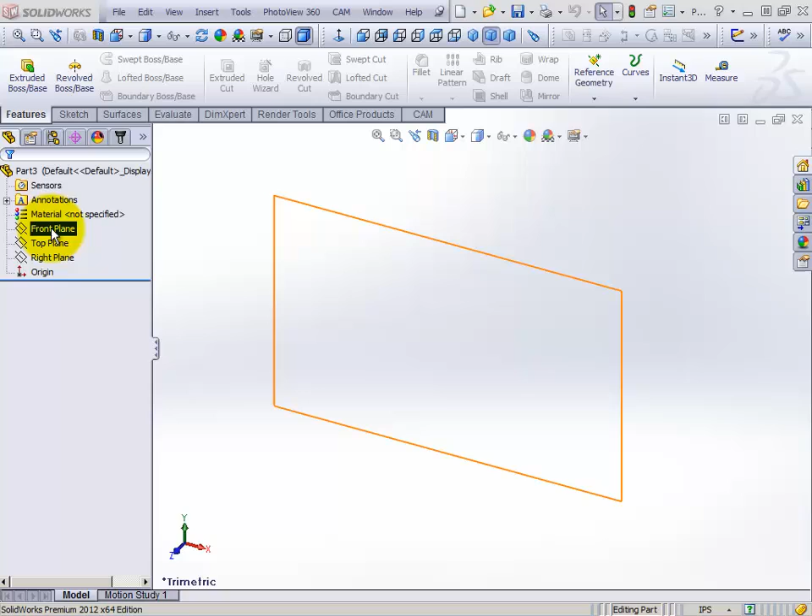So I'm going to do a File, New. I'm going to pick a part, and I'm going to go straight to the front plane here. Left click, sketch, and I'm going to pick the rectangle, center rectangle, and I'm going to pull that out to 1 and 1, and we're going to do check mark, and I'm going to pick offset entities here. If you get something weird like this, just do X and try it again, and a lot of times it'll just come back to what it's supposed to be.

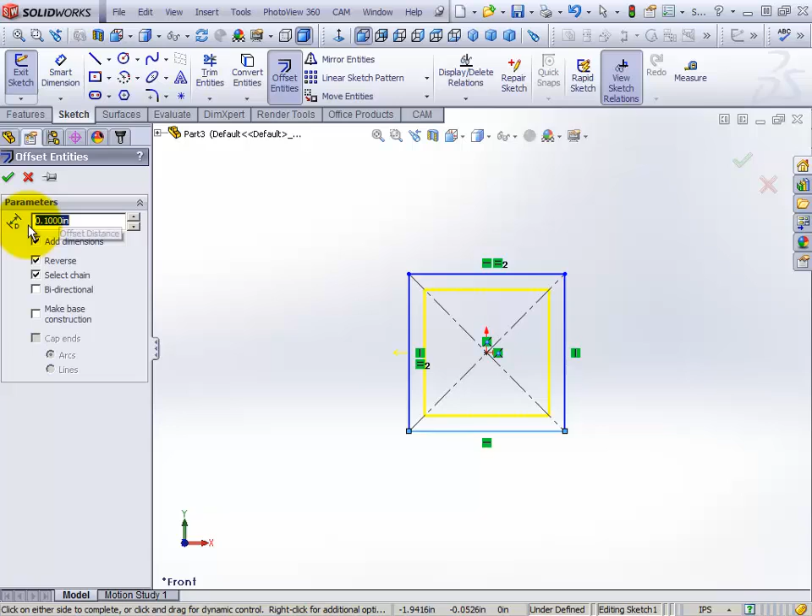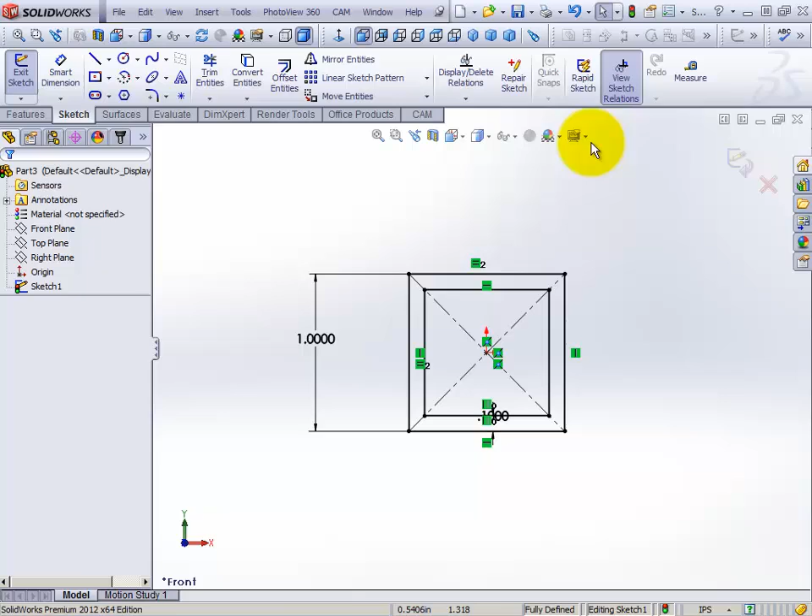Set this to 0.1, and you'll notice I made it a line on the inside. Okay, and we're going to go ahead and smart dimension this thing right away. And you see it's fully defined because all of the relations we've talked about before are all there. And we're going to exit the sketch. We can do that here, or we can do it here. So if you like doing it here, you can.

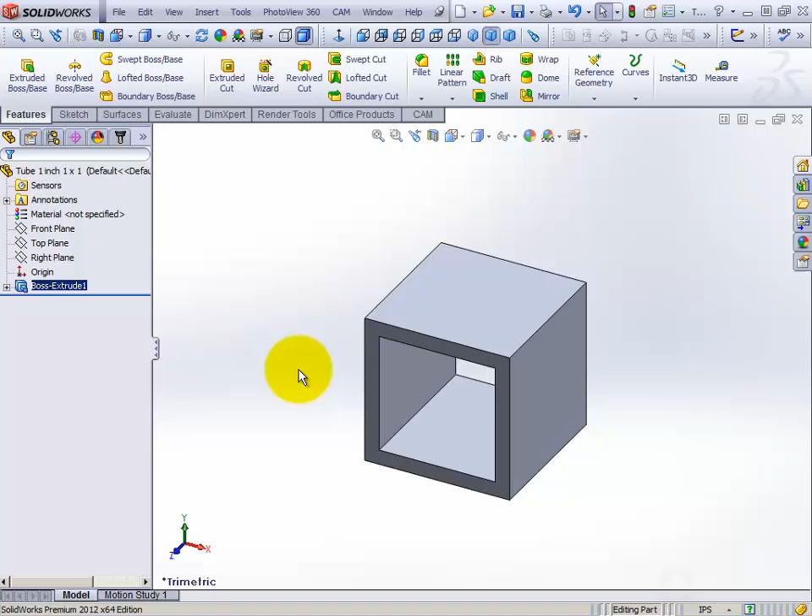And we're going to go up to extruded boss base right here. I'm going to pull this part out to 1 inch and hit check mark. And I now have a 1 inch piece of tubing. Now we're going to make up a family here, so I'm going to do File, Save As, and I've already got some of these here, so I'm just going to go ahead and save this as tube 1 inch by 1. I'm going to go ahead and capitalize that so it looks nice, and I'll say save.

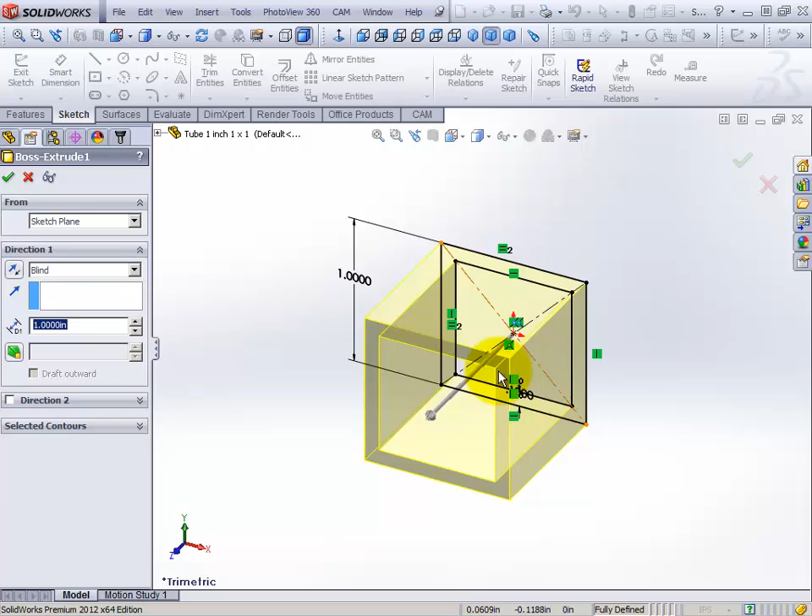I'm going to show you how to make another version of this. This is something you haven't done yet. You're going to go to Boss Extrude, click right, and you're going to see this one called Edit Feature. Edit Feature allows us to change things that we've already had on features. Now you notice this is showing our part with a 1 inch pull. Now I'm going to kick this up to 12 inches. I could just type the number in, but I always have fun watching it grow like that.

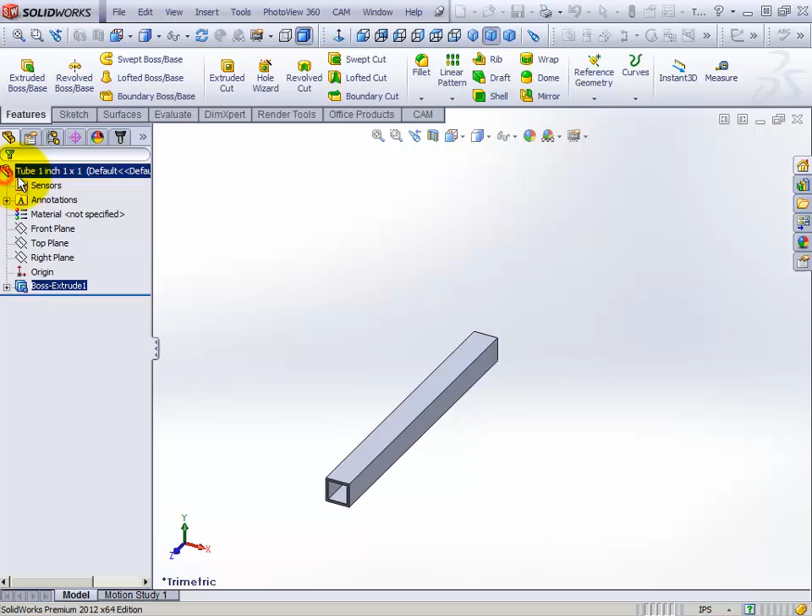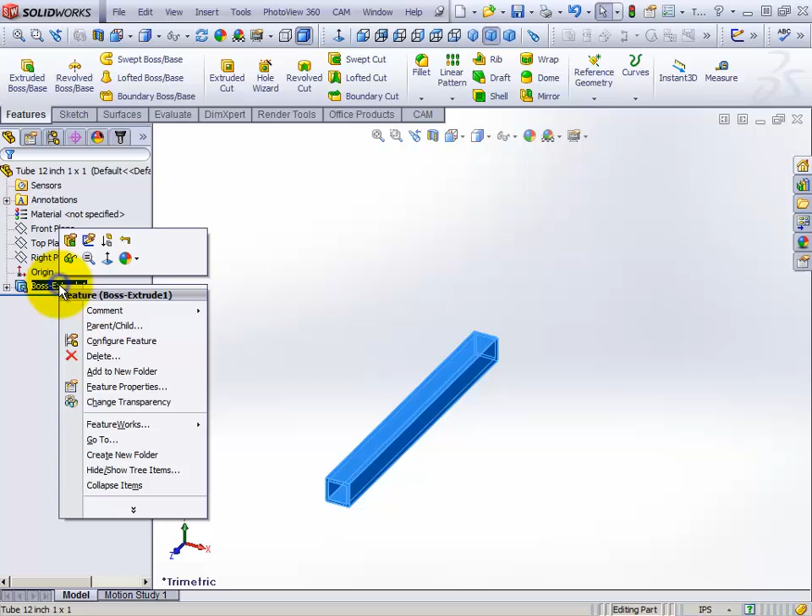Okay, now I have a 12-inch long tube. Hit OK, File, Save As, and I'm now going to just put a 12 here. So now I have a 12-inch tube. And you can see I already saved a 2, a 4, a 6. I'll save that. And then I want one more. I'm going to right-click on that, Edit Feature, and I'm just going to type in 24. And you'll see my tube got really long there. And I'm going to hit OK.

And I'm going to do File, Save As. And you can guess, I'm going to type in 24 inch here. That's right, type in 24. 24 inch. And hit save. Okay, so now I have a whole bunch of lengths of pipe or tubing that I can use for assemblies. So we're going to go on to assemblies here in a second.

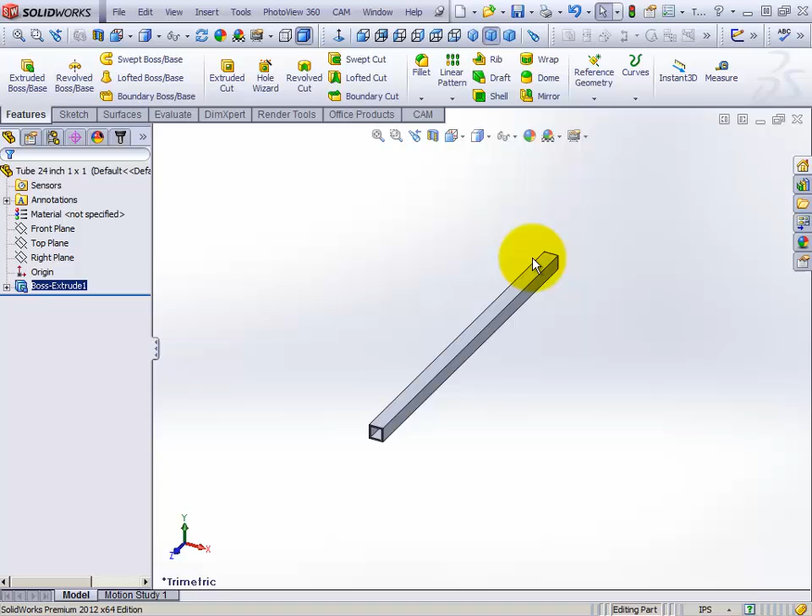Okay, we're going to go ahead and close this. So I'm going to do File, Close, and now I'm back to the base. And this time I'm going to do File, New, and this time I'm going to punch the Assembly button. This is the new one for you. You haven't used this yet. Hit OK, and it looks like this when we bring up the screen. Okay, we're going to want to put some parts in our assembly here, so I'm going to hit Insert right up here, Insert, Component, Existing Part.

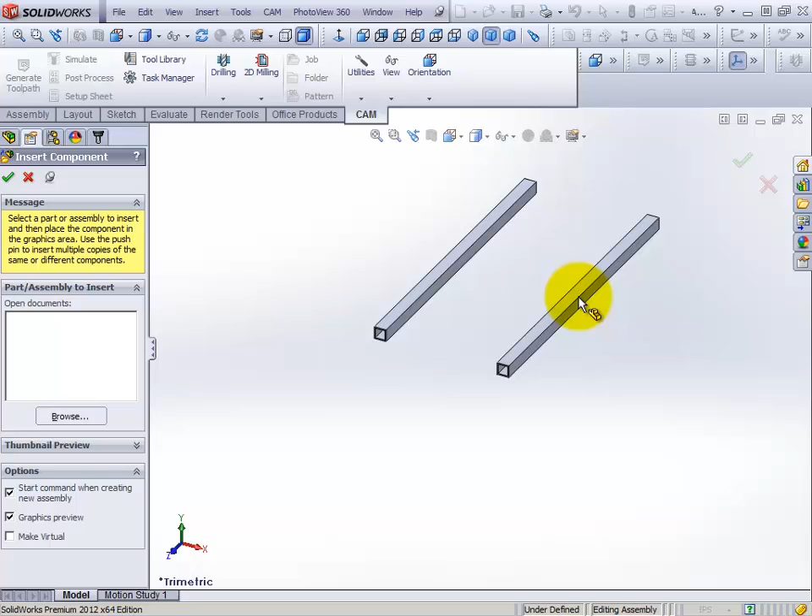Okay, and then I'm going to punch the push pin here, that'll hold that on, and I'm going to hit Browse. And I'm going to build a frame here, so I'm going to pick 24 inches and open that part up, and you'll see it gets attached to my mouse. I'm going to want a few of these because I want to build up a frame. So I'll put one there, one kind of there, one there, and one there. And when I'm done, just hit the escape key, that's the easiest thing. So hit the escape key and that'll stop putting that part in.

Now I also want to put some cross members to this, so let's use just 12 inchers for right now. So I'll go back and I'll do an insert, component, existing. I'll keep the push pin on here for a minute, browse, and I'll say okay, I want to use some 12-inch tube and open that up. And I can use different techniques here, but I'm just going to put these over here for a minute. I'm just going to pile them up, and we're going to just hit X out of the insert component here.

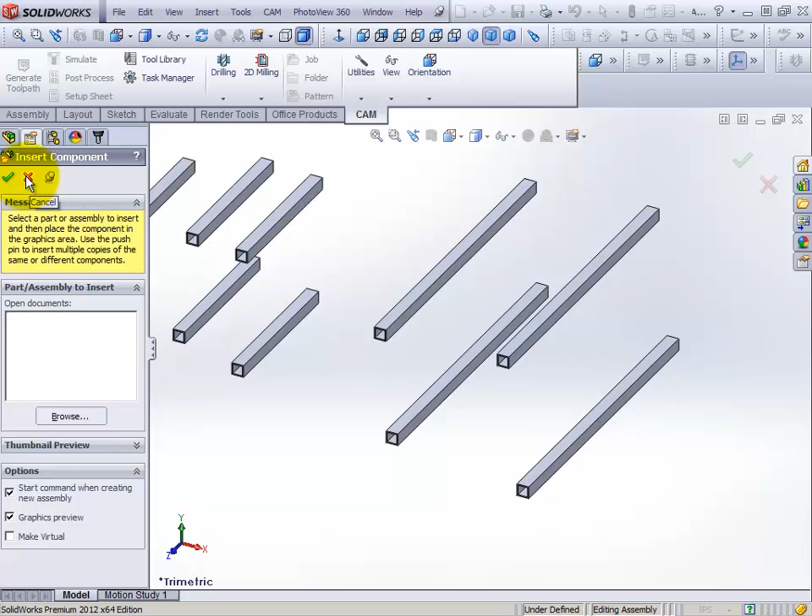Okay, to move one of these parts around, all you have to do is right click on it and you can drag it as far as rotating it around like this. Okay, so I can just kind of move it around until it's kind of right. Then I can left click it and just kind of drag it where I think I want it to be.

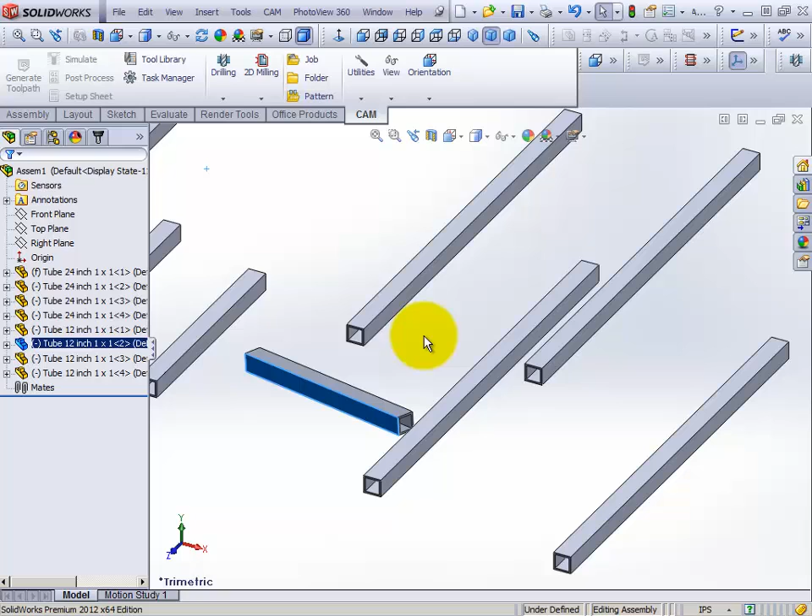But this gets kind of crazy because you're in 3D right now and things can be really different, you know, where they're really located. So you can see I just finally crossed into that part, so I'm finally at the right elevation. But we don't have to worry about all that. What you're going to learn how to do is mating. Okay, so go up here and hit the assembly tab. And I'm going to click the mate button right here.

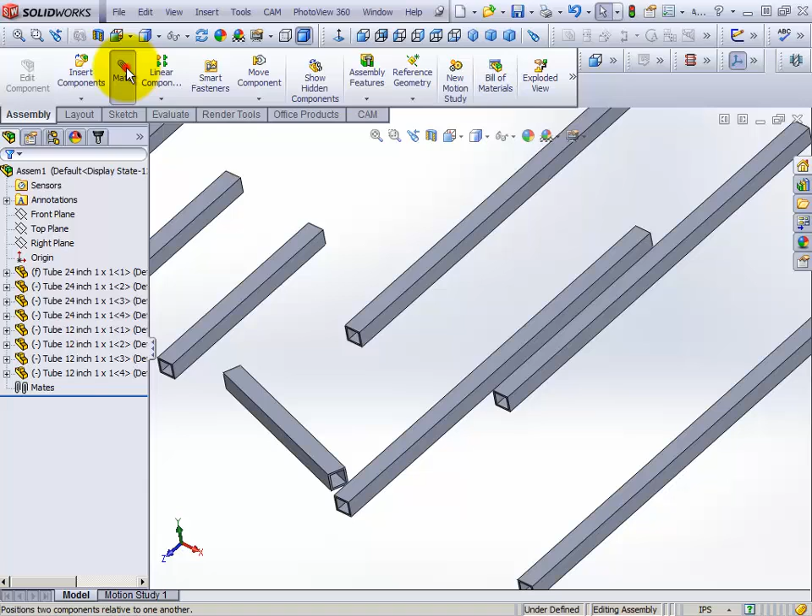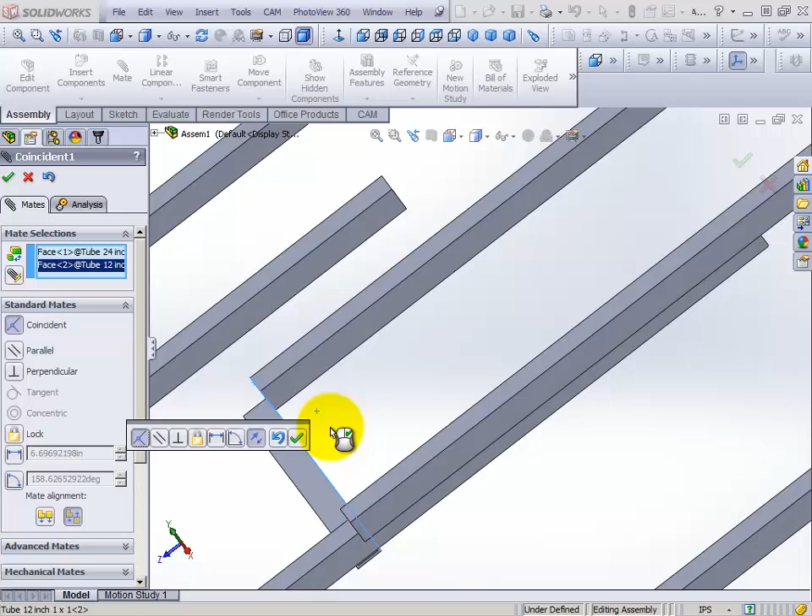And I'm going to zoom in and I'm going to pick the face of this. Now notice I can pick lines, but if I zoom in really close, you see I'll pick up that whole face. I'm going to pick that up. And then I'm going to turn, using my center mouse button, holding it down, and I'm going to pick the face of this one. Notice I'm not picking a line, I'm picking the face. And you see how it kind of aligned up like that? I'll hit the check mark right here, meaning I like what I just did.

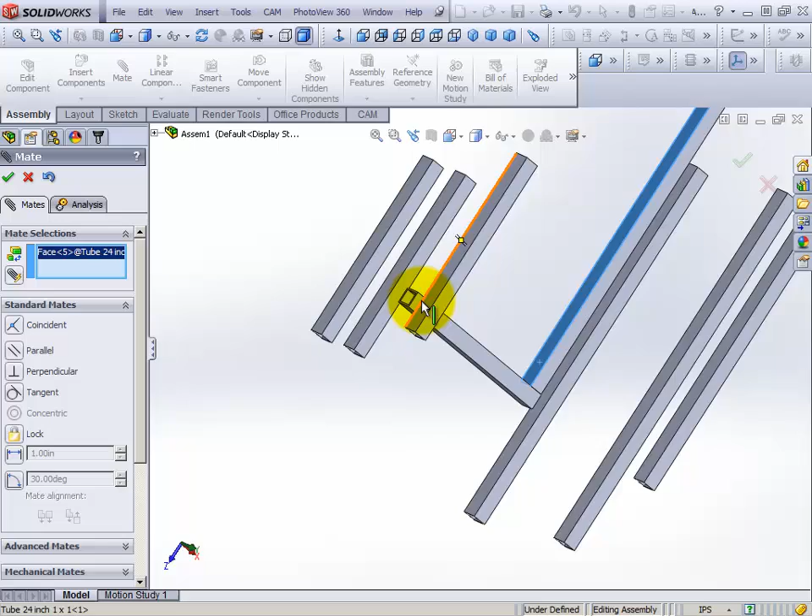Now that's part of it. Now we want to get this and this together. So I'm going to pick this face and this face. Okay. And I'll say, yeah, I like that too, because I'm starting to put these together. But I really wanted to put this end and this end of the tube. Now zoom way in, get the face of that tube. You'll see it suddenly disappear, and oh my, look at that. It's right where we want it. We just put a nice joint together. It took 3 mates to do that.

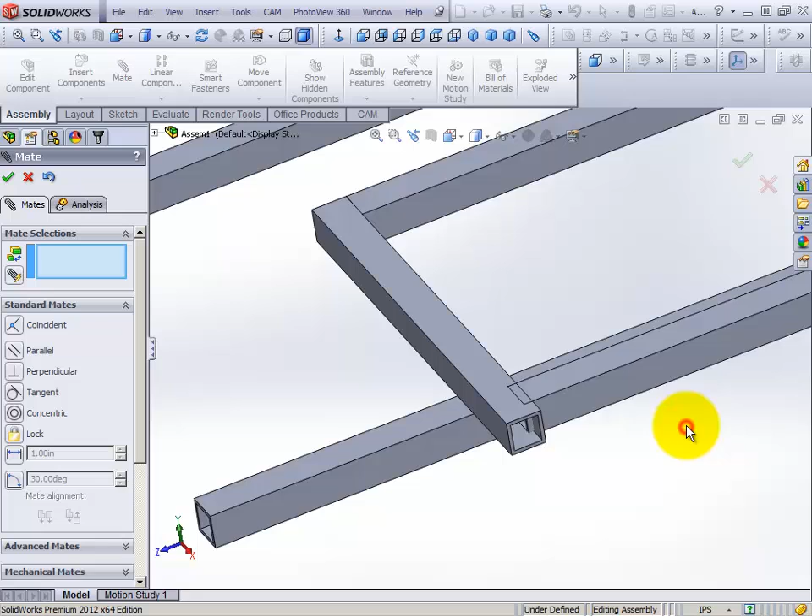Okay. Now I'm going to pick another one here. I'm going to pick this face and this face. And you notice those sort of went together. I'll pick this face, zoom in on this face, and those two went together. But you'll notice that there's one thing with a problem. You know, I can pull this away. Okay. And what I have to do is I have to pick this face. I'm just using left mouse clicks here, and you'll see I put that one together.

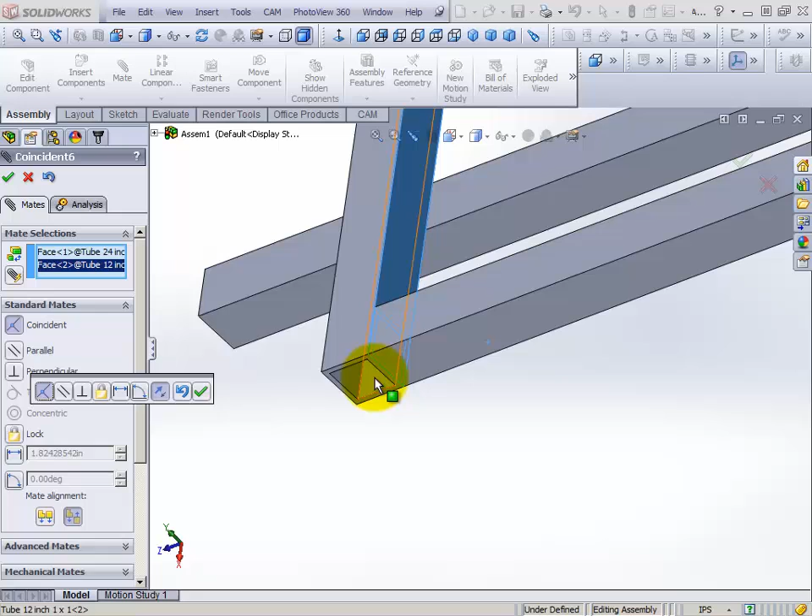Now I can take another tube, like this one, and you just got to kind of get used to looking at this stuff in 3D. I'll move this one out of the way so it's a little easier for me to see. So this time I'm not even going to try to orient them. I'm just going to pick this face and this face. Now they're already wanting to be together here. I'll pick this face and this face, and they want to be together.

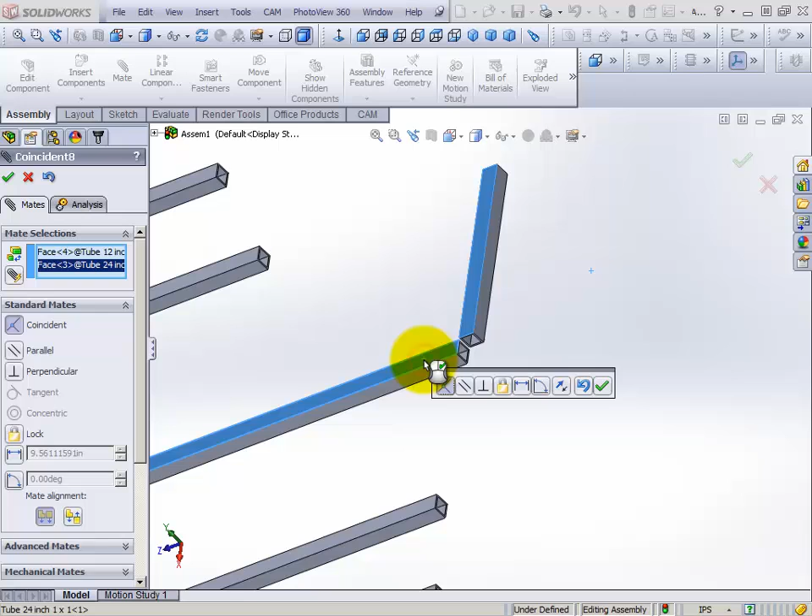And remember, I wanted to actually put this together the other way, so I'm going to pick the end face here and this face, and that lines up those two faces. These are all called coincident mates. Now you notice I didn't actually have to put a mate on this one. It's not important that I do, because it's not like these are mechanically fastened. They're all being constrained in space. So right now I have a complete tube set.

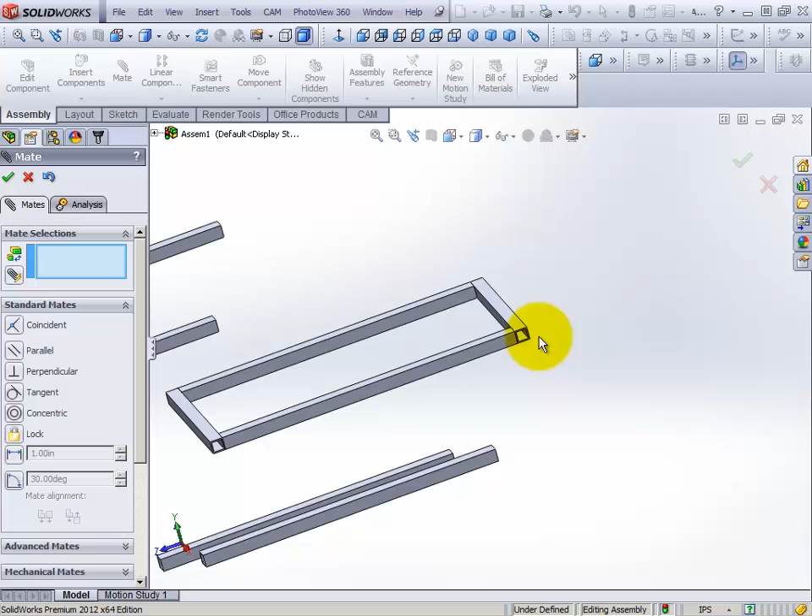Okay. Now I'm going to do it again. So here we go again. I'm going to build the other side of the frame. So I'm going to drag this down so it feels a little bit better to me. And I'll even use the right mouse click to rotate it and hold it and drag it. So I've got the right mouse click held down right now.

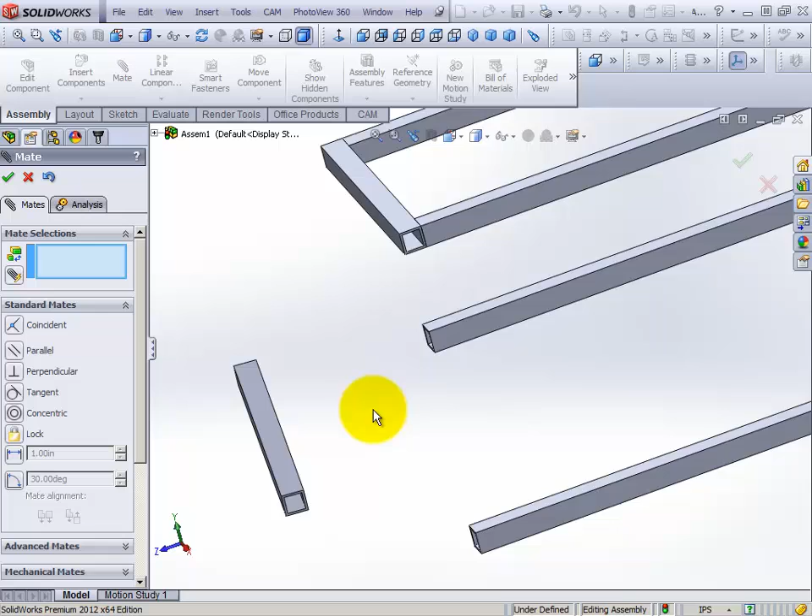And same thing, I'm going to zoom around with my middle mouse button so I can turn it around and see this. Pick that. And I'm going to turn around. I want to pick this face right here. And sometimes it'll look kind of strange, but you just keep doing your faces and it'll all work out for you.

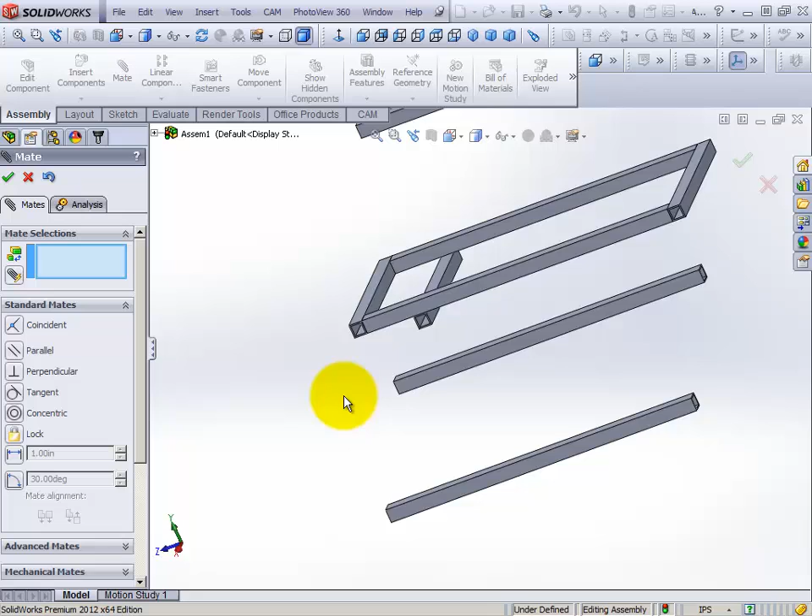Okay, now I want to put this face right here. Zoom in until you can get the face. You don't want any edges, you want faces. And as you can see, it zings it right over into place for you.

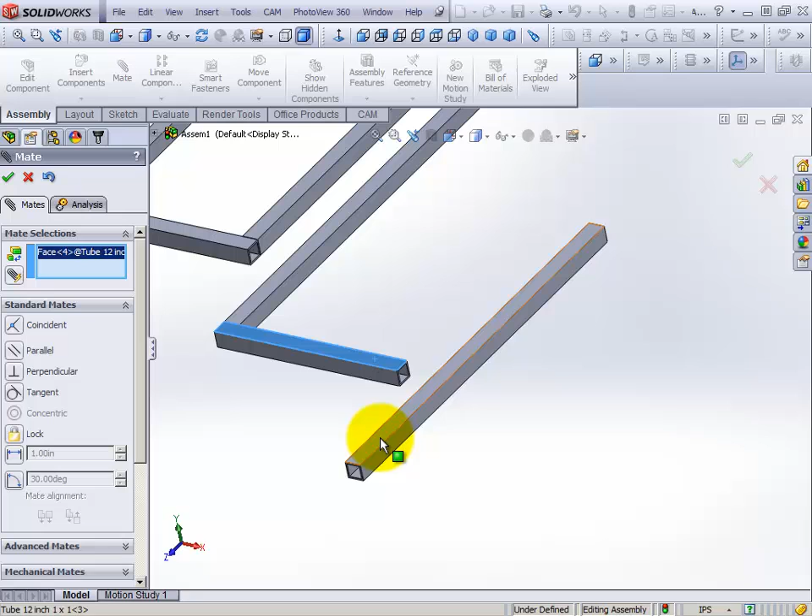We'll pick this face, and puts those together, and you can see I'll slide it over here now. And I want to pick, just keep zooming in until you can get a good grab on it, that face.

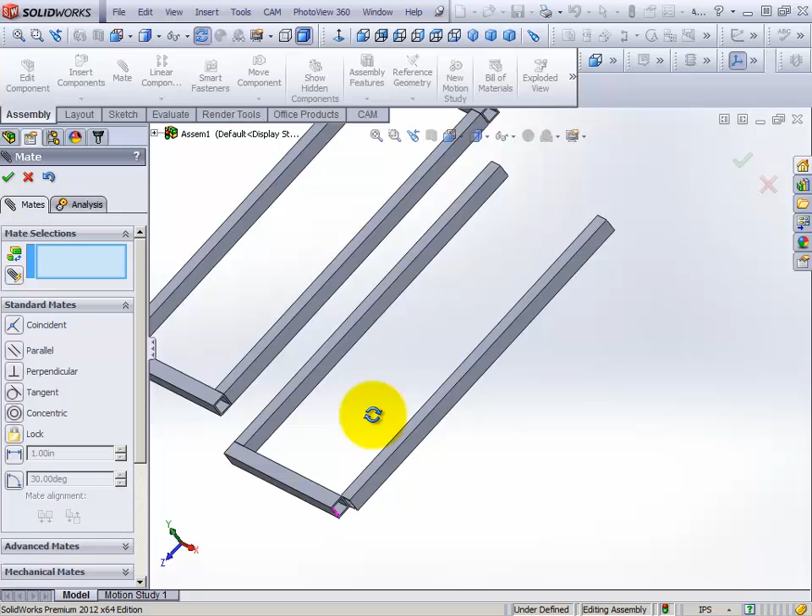After a while you'll get used to working in your 3D world here, okay? It'll feel real comfortable to you. And I want this to line up with this. And once again, if you can't get the face, zoom in, okay? Once you zoom in, it'll become real easy to get it. A lot of people make the mistake of trying to do everything from long distance, and that's not good.

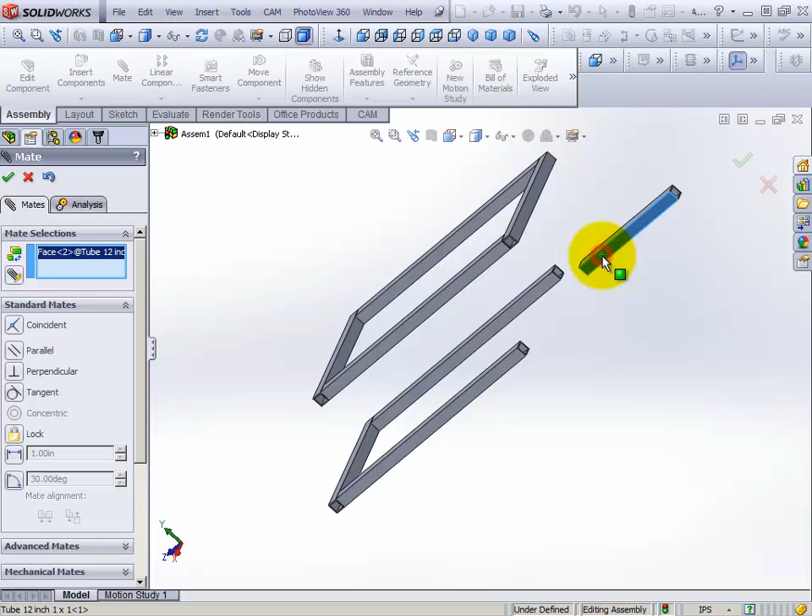So I'm going to pick this face. Okay, I slid on that one, so I'm just going to pick this face. And this face. Oops, see, that's a line, I don't want that. See the undo? I want to do undo. So I have to start again.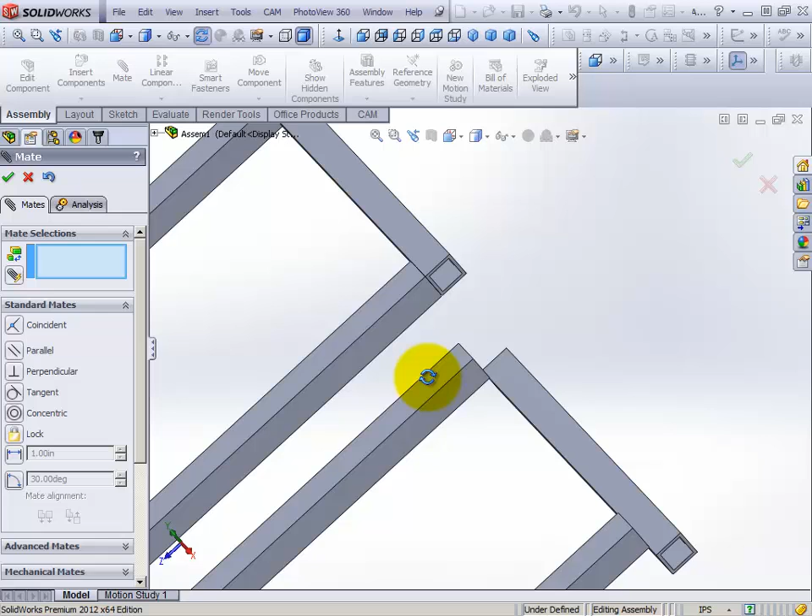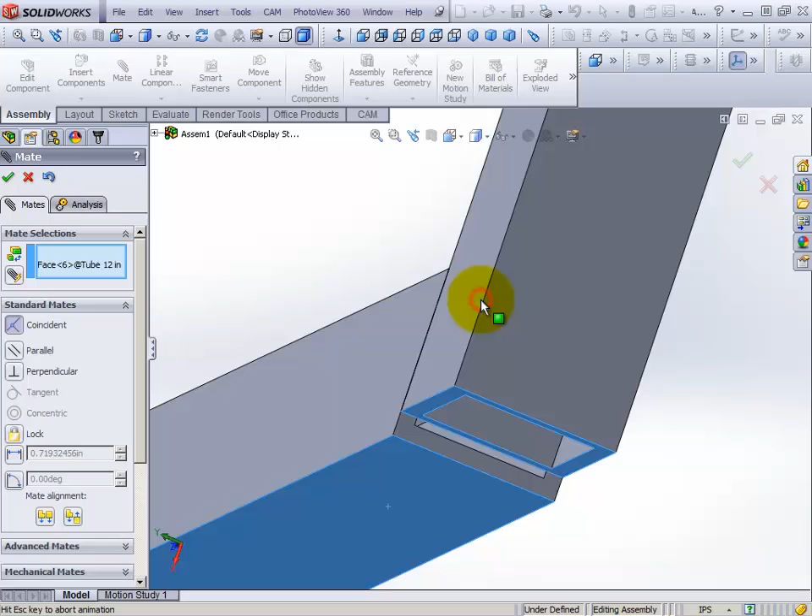So I'm going to pick this face and this face. Okay, and I want to pick this face, that face. And notice we still can slide this way, so we still have to fix that. So I can actually just pick this one over here and pick this face and that face. So as long as I'm all done, they all slide together like that, that's great.

Okay, so we have two frames here. What we want to do is put this together with a couple more parts. So we're going to go back up and do Insert, Component, Existing Part, pin that, Browse, and let's pick the 12-inch tube.

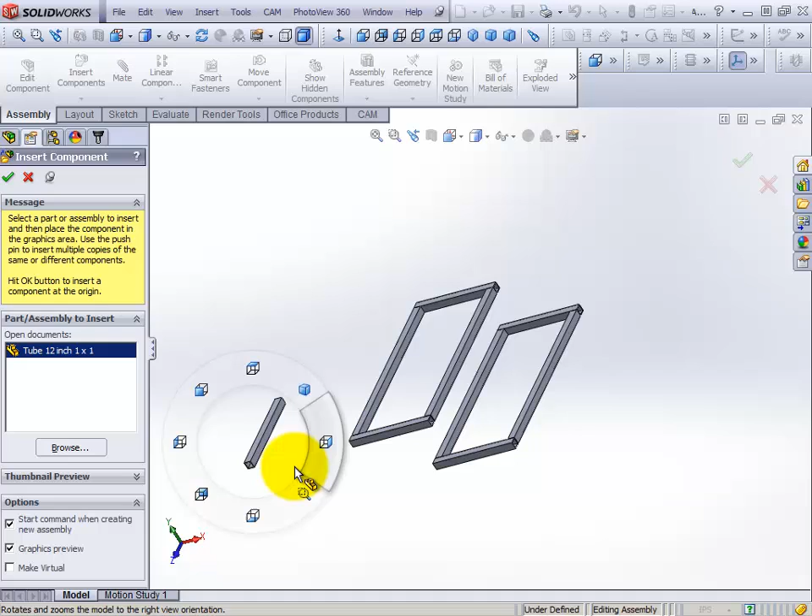Okay, and I'm going to go ahead and place that one. I need 4 of these, so I'll just put these over here. And then when I'm done, I can just hit X here, and I'm done with that.

And now what I want to do is put these as support members. These are going to be called columns now. So I'm going to kind of move this, rotate a little bit so I feel better about how this is going together. I'm sorry, I just hit an extra click there.

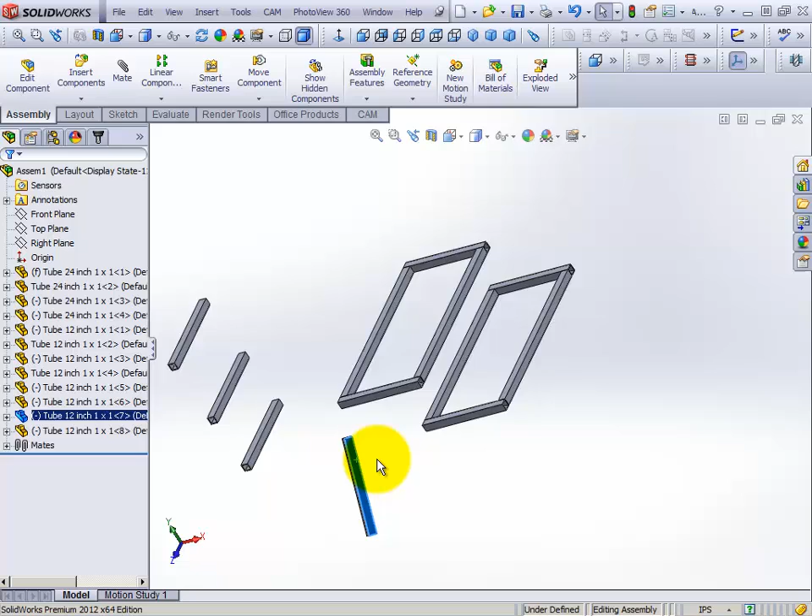And I want to hit Mate again up here, Mate. And I'm going to click this face. And that face was already selected, so it'll line it up. And then I'm going to click this face, and I got to click the underneath side of this one because that's where I want it to go. Okay.

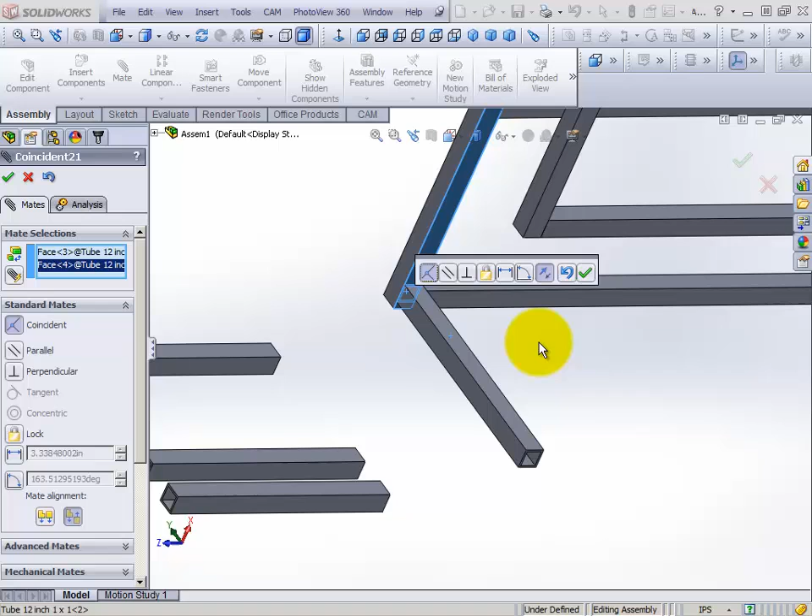And now you'll notice I can move it this way, so I still need to get that lined up. So we'll go over here and we'll pick this face and this face. And I hit OK. So now I've got that corner lined up.

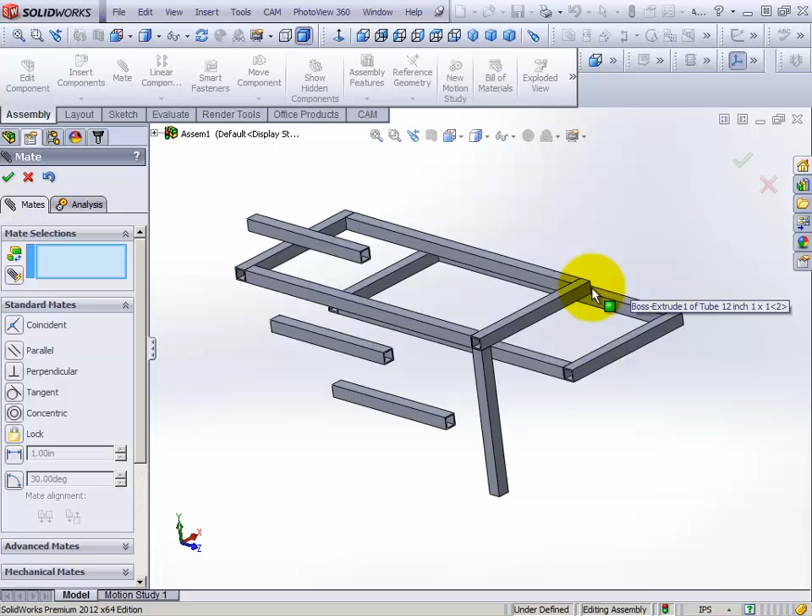Let's go and do another one. I'm going to pick the end of the tube. And sometimes you're going to want to just take that right mouse, hold it down on there, and rotate a little bit so it makes it easier for you to see stuff. And then zoom, and then you can take this and just move it out of the way.

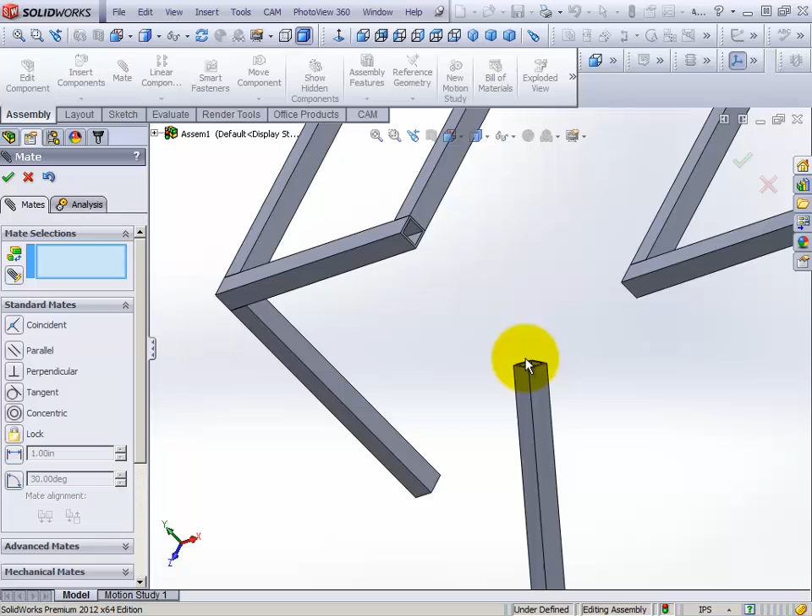It's just like working with real parts. You just kind of toss them around however you want them. So I got this one a little bit more rotated the way I want it to look, but I don't have to because my constraints, my mates will take care of that.

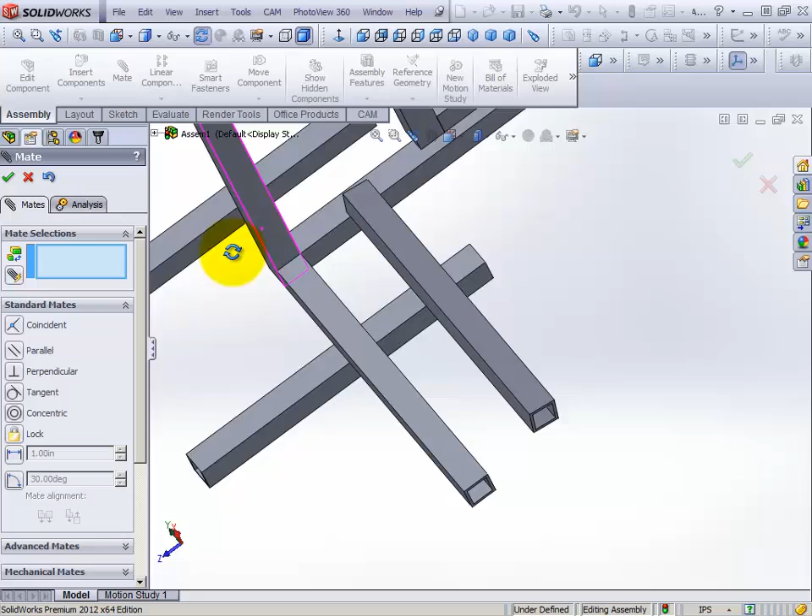So I'm going to pick this surface here, and I'm going to pick the underside of this. And that gets that started. And now I want to pick this face, and that got that started.

Now notice this slides around, so I got to get this and this lined up. So I'll pick this face, and I hit the OK on that one. I still have a couple more to do. We're getting there.

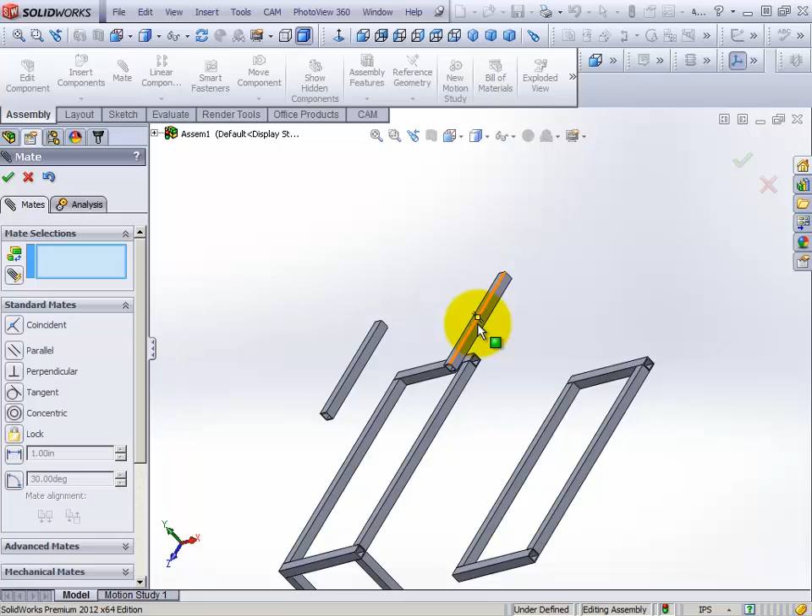I'll pick this one, and I'm going to rotate this around so I can work on this end. And I'll just go ahead and rotate this in space to make it a little easier to see that other side. This is called virtual modeling, everything we're doing here.

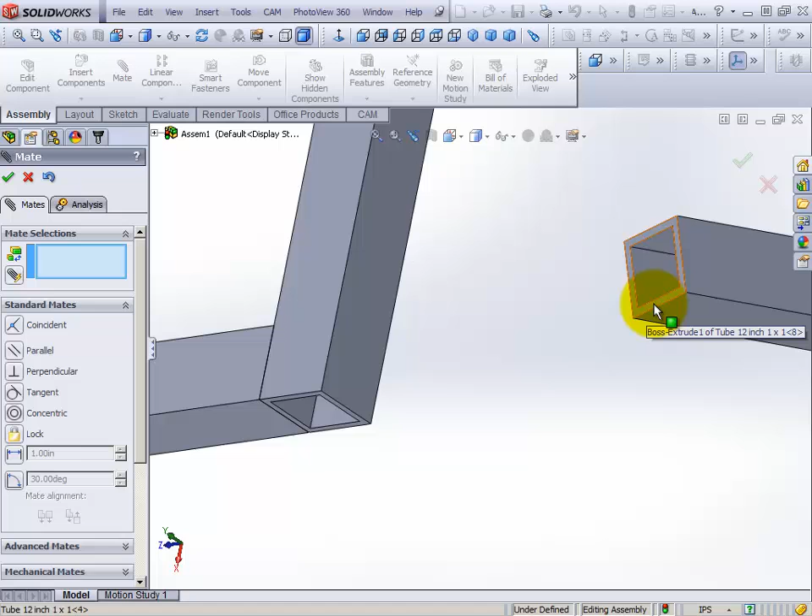And I'm going to go ahead and just rotate in here, and I'm going to pick this face here if I can. Okay, I got that face. I need to put that underneath here, so I'll pick that face. I'll pick this face and this face to be coincident.

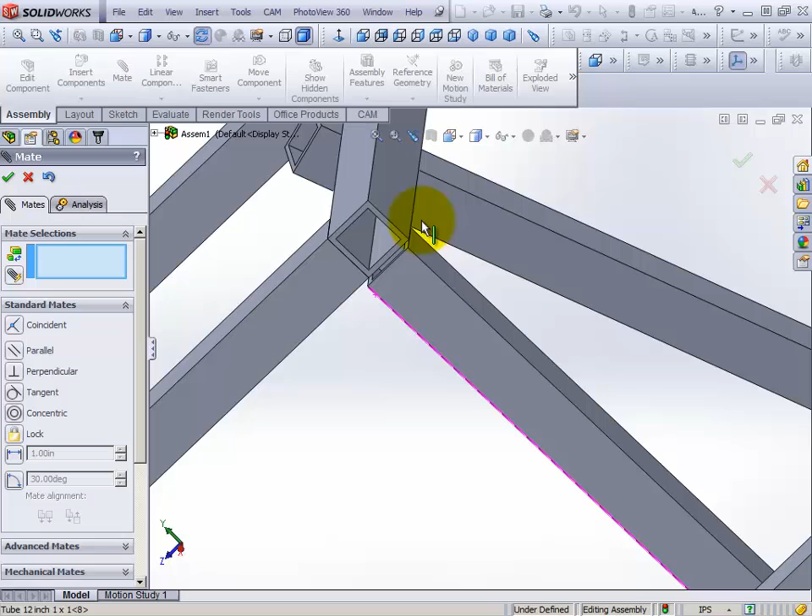And this leg's still sliding around, so we have to go do something with that. So we'll pick that face and that face. And now those are together.

I got one left to do. So now all I have to do is zoom in, get that face. I want to go underneath, so I'll get that face.

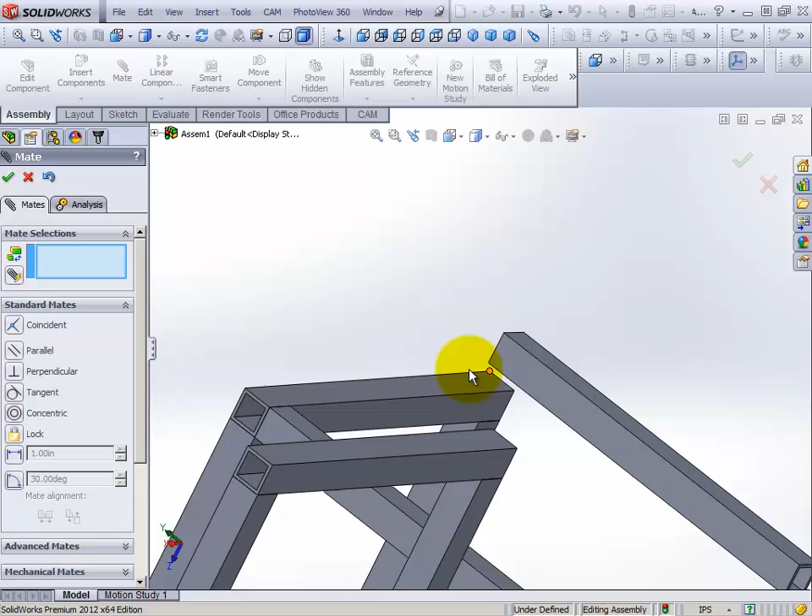Okay, then I want to have this to this. This is sliding around, so I have to go around the other side, just using my middle mouse button, holding it down. I rotate the whole assembly, and that face goes there.

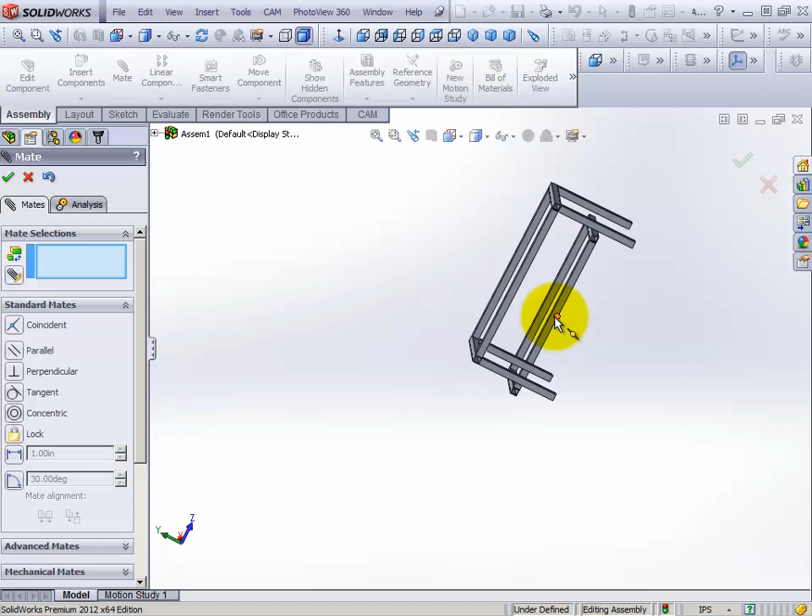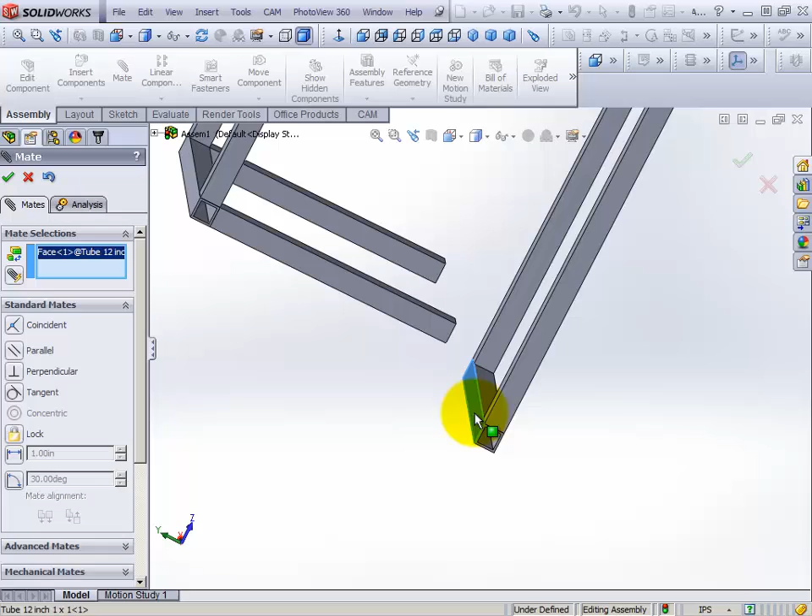Okay, so I have that done. I have one thing left to do. I've got this part right here I want to attach to this. So what I'm going to do is treat this as just another tube. I can pick that face and this face, and that'll line that up. And then I got to pick this face right here, and that face, and that's lined up.

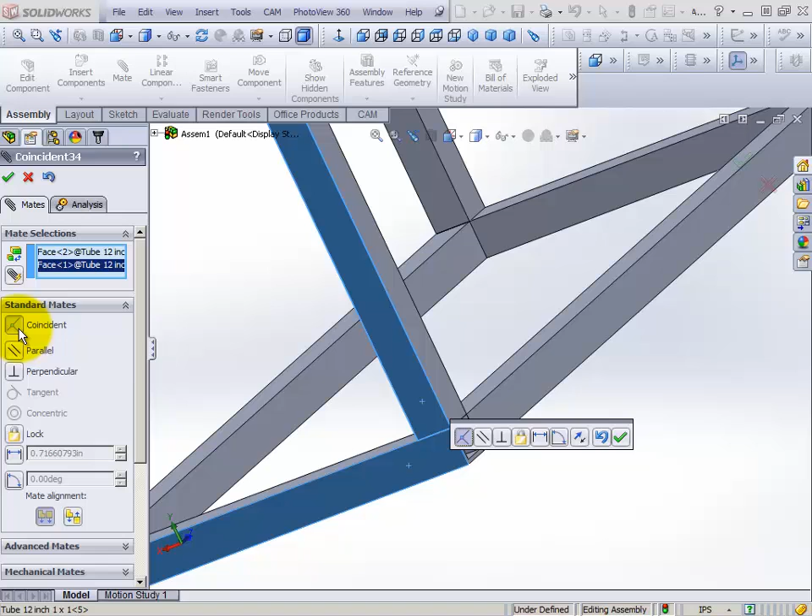You'll notice this slides around, so I kind of want to keep my assembly together here. So I'm going to come in and pick this face and this face. Now what you may not have noticed is over here with mate selections, you're going to get 1 and 1, 1 and 1, 1 and 1, and they're all coincident mates right now. So that's easy to do.

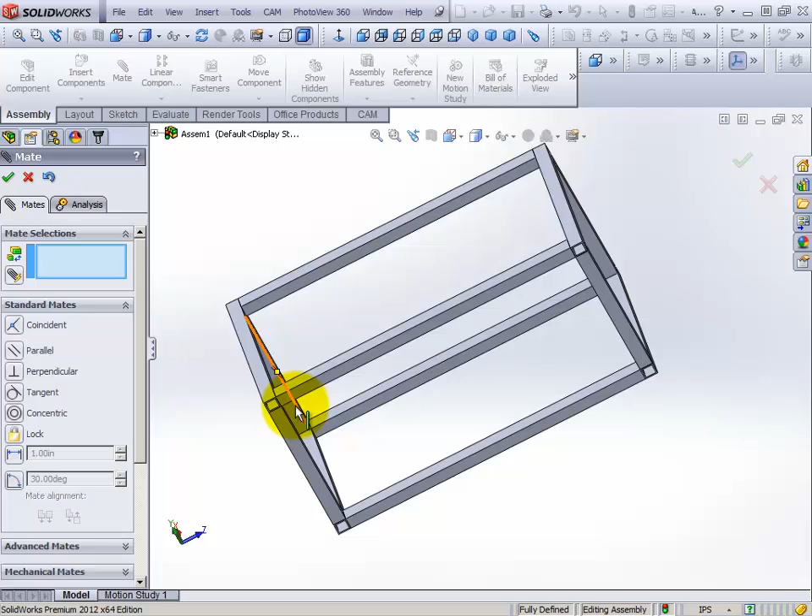And you'll notice we just built a structure. For the factory people, this is pretty much what you may end up building for your base product, where the frame of your project will be inside of this area. So this is how assemblies go.

Okay, I'm working with pre-made parts that I already made. You saw how quickly I can make several parts just by going in and doing feature adjustments. This should get you in pretty good shape to start building your projects. You make your parts and you just put them together.

I'm going to show you a couple other mates here in just a minute.

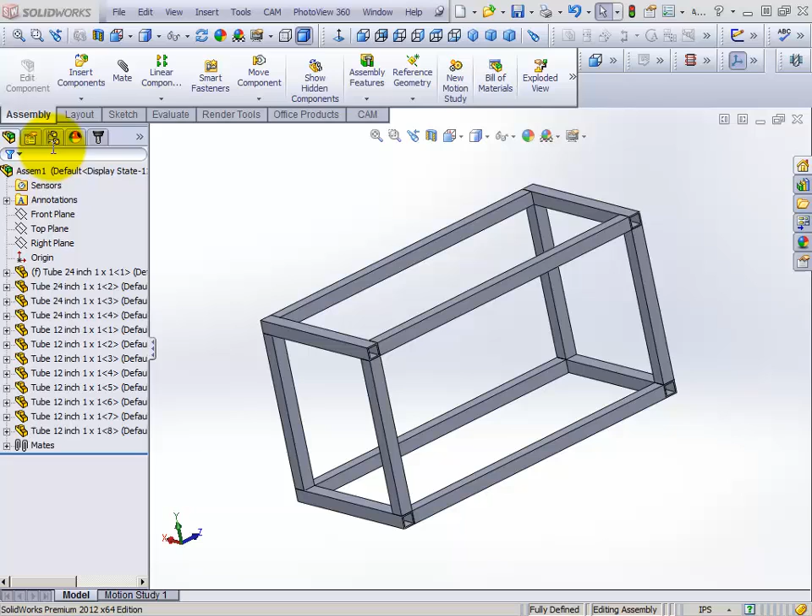Just going to show you, I forgot to do this. We're going to do a save as, and this is an assembly now. So we're just going to call this the frame assembly. It doesn't have to say assembly, I'm just saying frame assembly because that's what it is. And I'll save that. I'm going to go ahead and close this now because we're going to create a different part here.

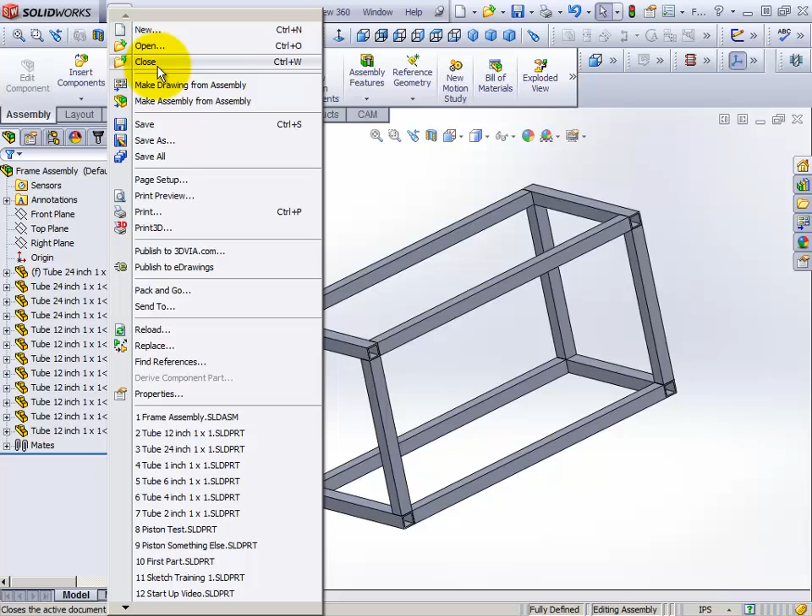File, New, and we're going to pick part because we want to make a part this time. Let's just go ahead and do a front sketch, pick a circle, and I'm going to pull it out to 2 and hit enter, and pick offsets.

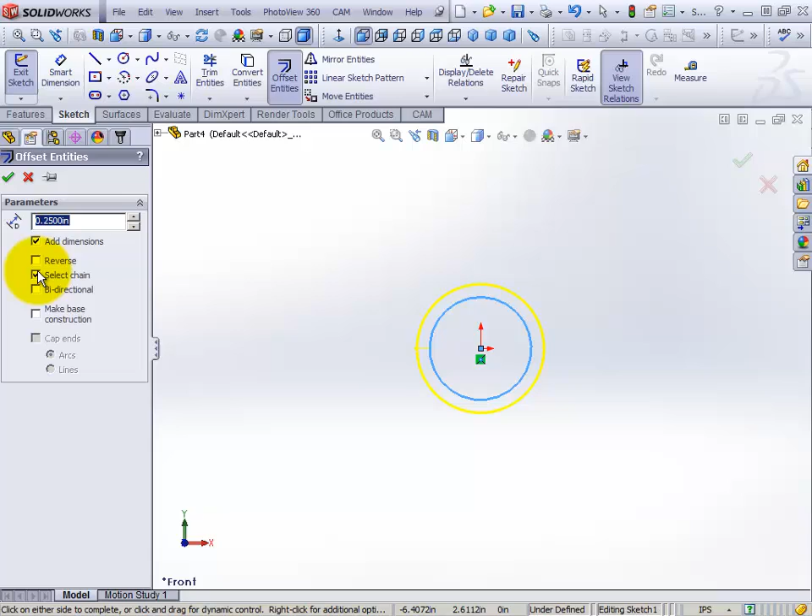I'm going to set it to 0.25, and I'm going to reverse it so it makes the offset on the inside. Hit OK. Then I'm going to hit exit sketch, hit extrude boss base, and go ahead and make that about 1 inch.

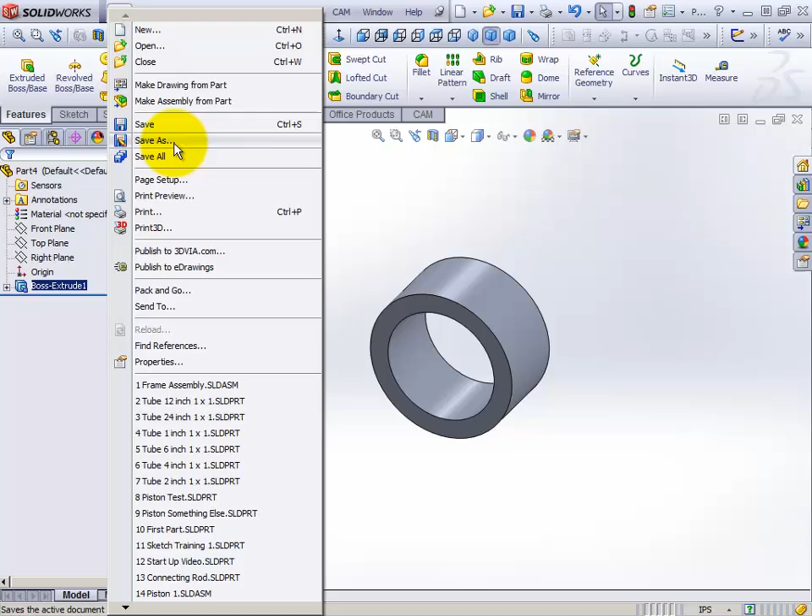This is what's called a collar or a tube spacer, and it's pretty common. We're going to save that as a 1 inch spacer. You always have to use a name in front because the naming systems don't like you doing it another way. So spacer, 1 inch diameter, and 1 inch long. It's pretty important that you save your parts with names that you can remember.

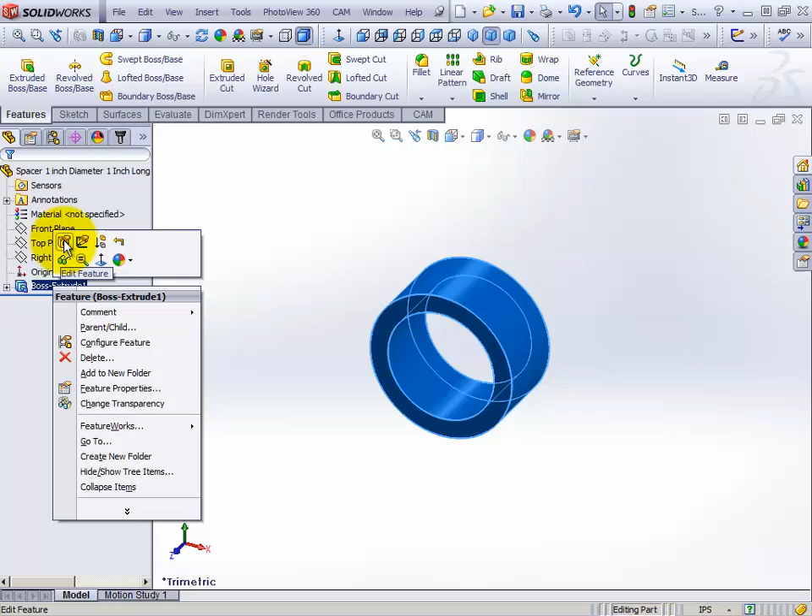Okay, so I have that one, and I'm going to go ahead and use my same trick I did last time. I've got this part already done. I'm going to right click the extrude boss base here, go to edit features, and make one 3 inches long. I'll just hit OK here, and I'm going to hit File, Save As, and I can just use the last one and say, okay, this one's 3 inches long.

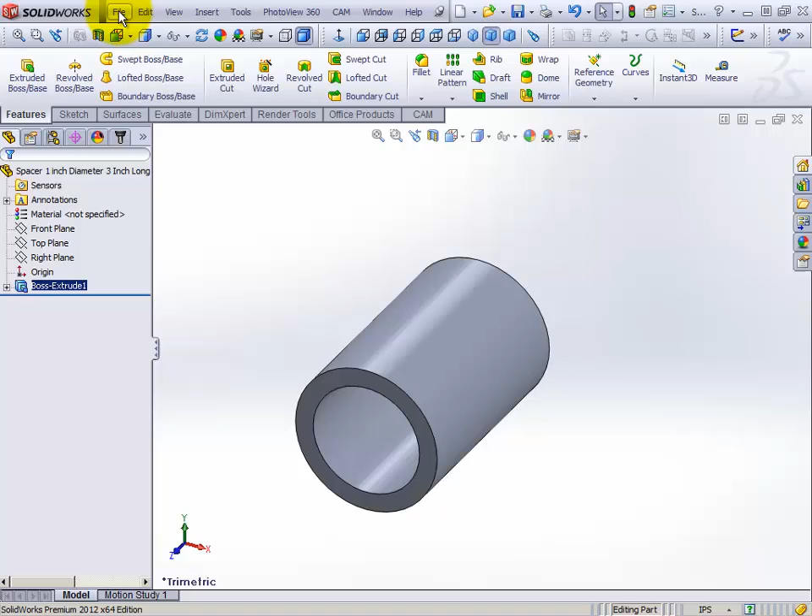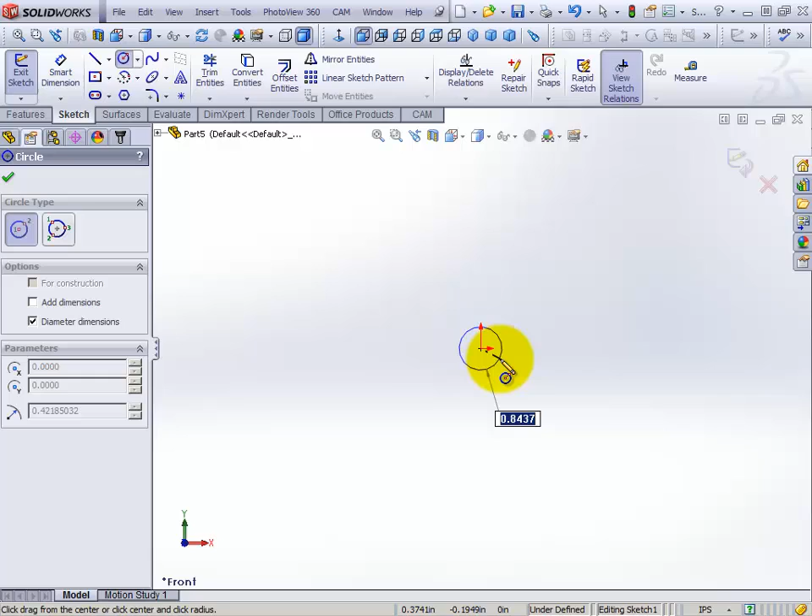Hit save on that. Okay, and then let's go ahead and close that part because we're done with that one, and let's do one more new part. I want you to get used to the flow here, you notice we're just kind of moving along. I'm going to click front plane here, do another sketch, do another circle, and this one I'm going to make 0.5 inches.

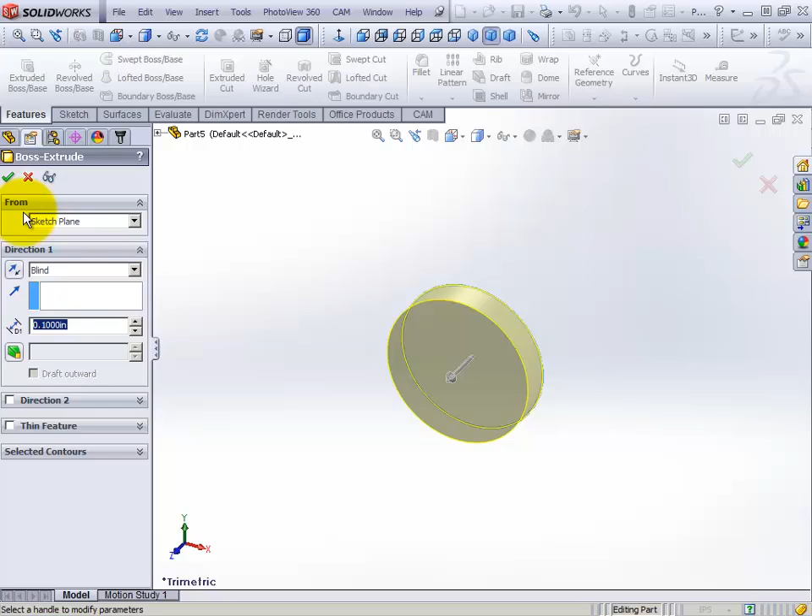I didn't do it on the last one, but let's just make sure we keep dimensioning, because I should have dimensioned that last one, but it's okay, it'll work right now. Then I'm going to exit sketch, go to extrude, and make this about 1 inch long. We're going to save this as a 1 inch pin. Okay, pin.

You're going to have to be 1/2 inch... 1 inch long pin. And save that. Okay, now we're going to go ahead and close this one.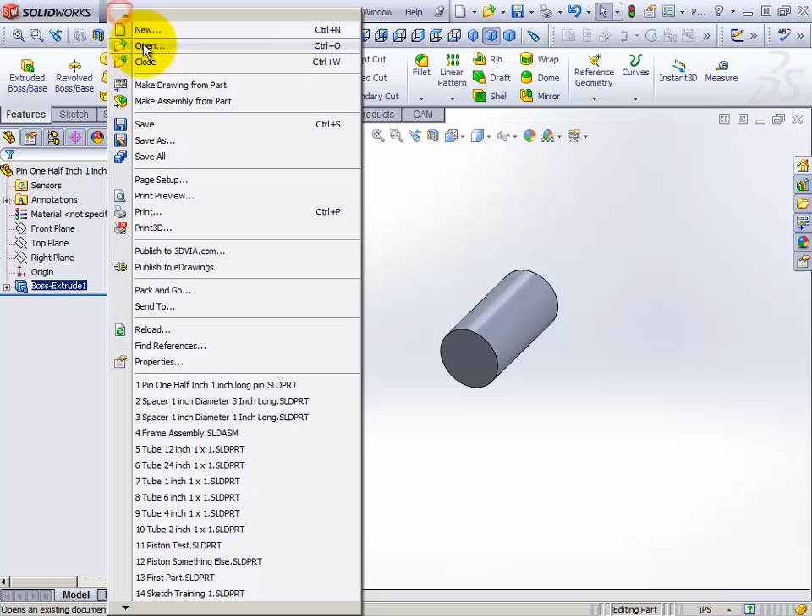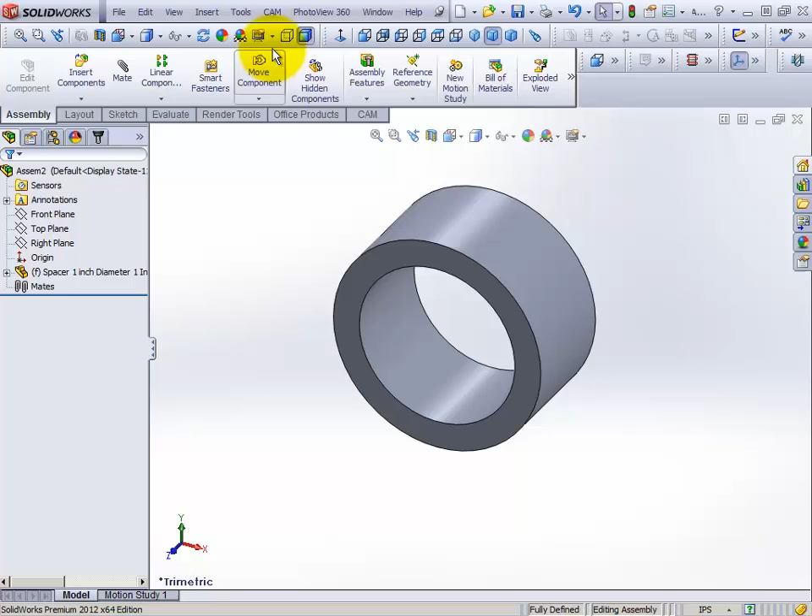Now we're going to do File, New, Assembly. Now I'm going to pin this. I'm going to browse, and what I want to do is bring in the two spacers, one of the 1-inch. Then I'll hit X to stop bringing that one in, do Insert Component, Existing, Browse, and bring in that 3-inch.

Okay, and then I want to bring in one more part. I'm going to do Insert Component, Existing Part. I want to bring in that pin that we made. There it is, okay.

I made that pin too small, so I'm going to do a double check here. I think we're going to go ahead and leave it like that because it's going to be kind of an interesting mate. So what we're going to do is we're going to hit mate.

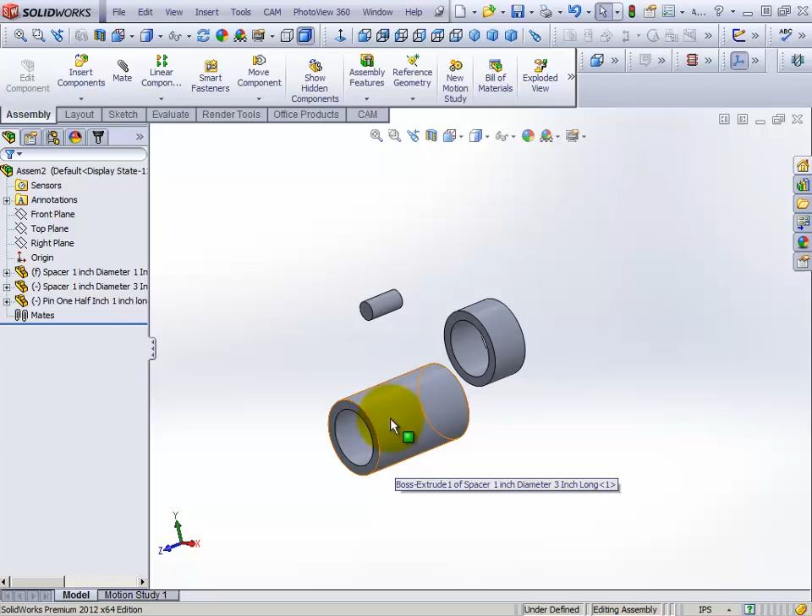What we're going to do is pick the inside circle here, that cylinder, and that cylinder. You notice they lined up. The system automatically knew they were circular parts, so you see this concentric mate? It means it's going to line up the axes of these parts.

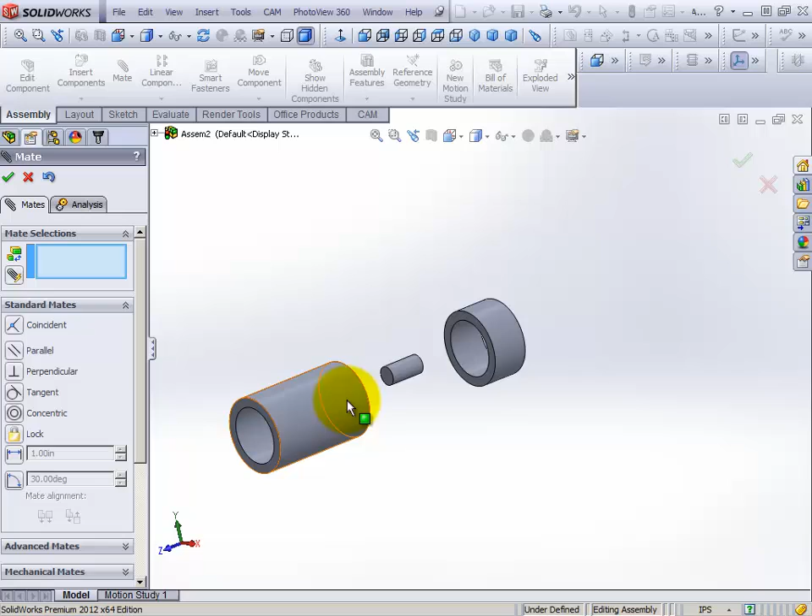This is a terribly sized part, but it'll give you an idea here. This would have been the axle - I just didn't pay attention to my sizes here. But what I'm going to do is pick this, and pick the outer side of that. Let me just do that one more time. I'm zooming in here. I'm picking the inner surface of this, and the outer surface of that.

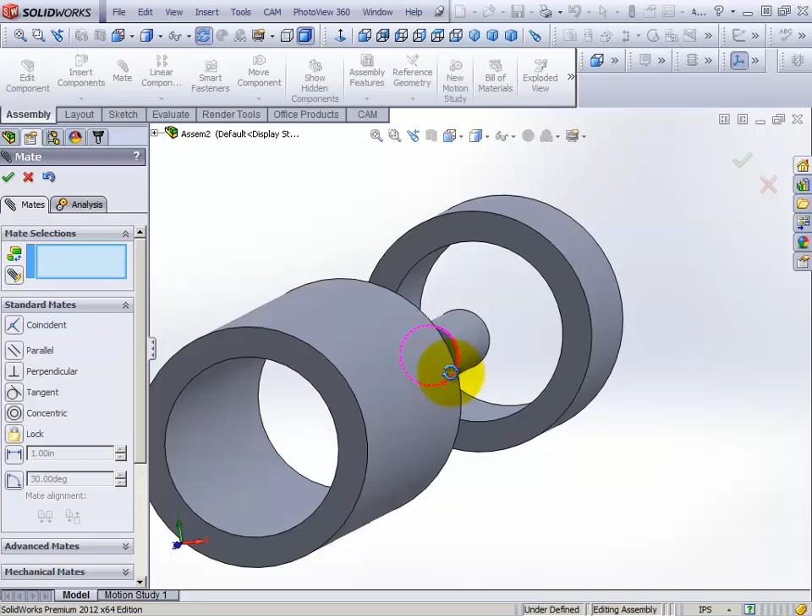And I'm checking OK. Now if I swing around, you'll notice that it put it right in the middle. Even though it's not physically attached to it, it's right in the middle, and that's what we call concentric mates. In other words, it makes sure that the axis of this is the same as the axis of that. It puts them concentric. Now you're going to need this when you put certain parts together.

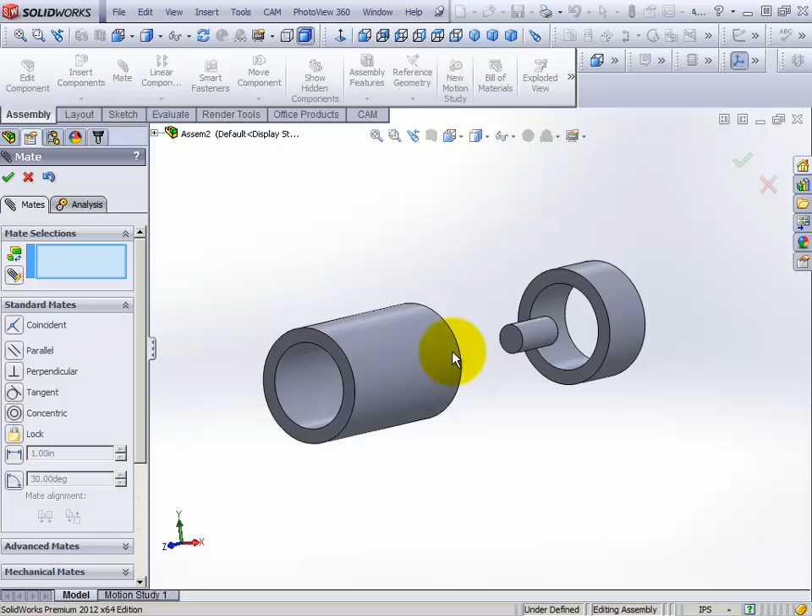Notice when I did this assembly, I can slide this around, but it's still right down the middle. But the last thing I want to do here is put these two together. So all I have to do is use the same coincident mate you've used before. Make sure it's a surface, and you'll see it's mated together. But I'm going to show you one little difference here.

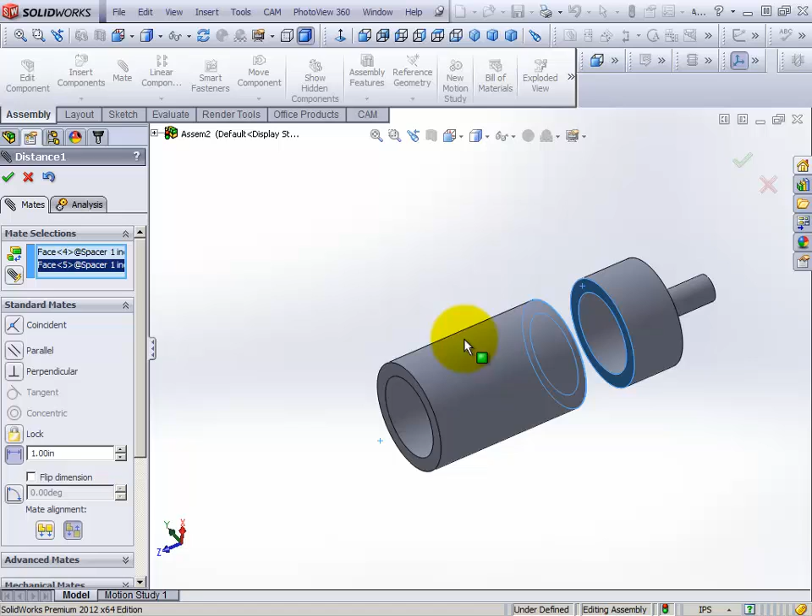So this is a coincident mate, but I'm going to go pick one over here called - see this distance button over here? It's also here too, in the shortcut menu, but I'm over here for distance. And I can put in here 1.000 inches. You'll notice that it's mated now, but it left an inch gap between here.

That's how you can do certain types of mates. You'll come up later, you'll be able to just say, okay, I want this to be coincident with this, but I want it this far apart. I can do that over here too. I can say, okay, well, I want this - oh, sorry, I'll just click OK on that last mate.

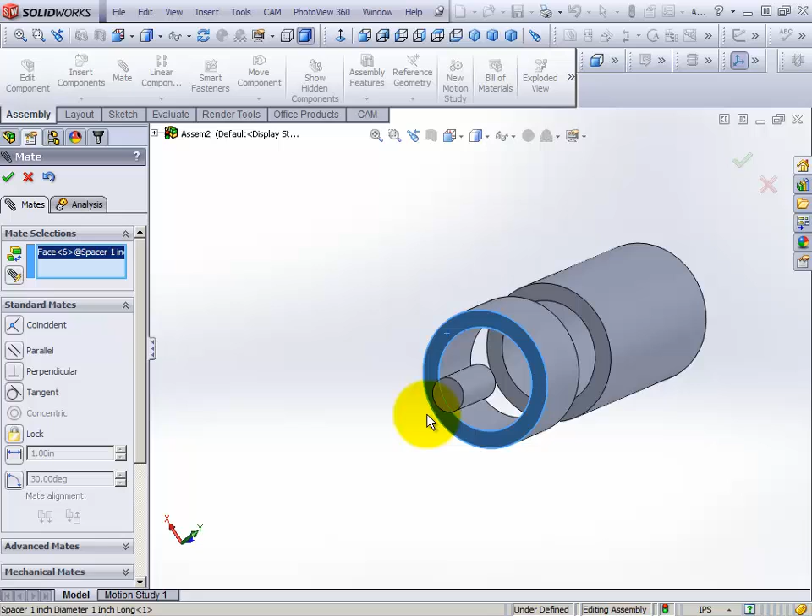Click this, and see how it wants to make them the same. But I'll just click my shortcut distance here, and it'll let me set a number. So I'll say, I'm going to leave that at 1.00 inches, and that'll kind of make an axle for me here. So you can start seeing like that - if I look at it from the end, it kind of looks like a wheel now.

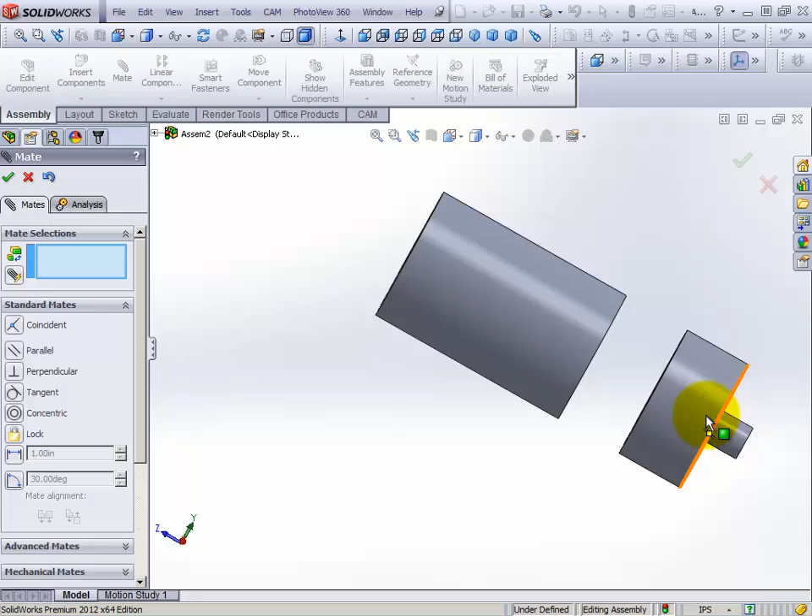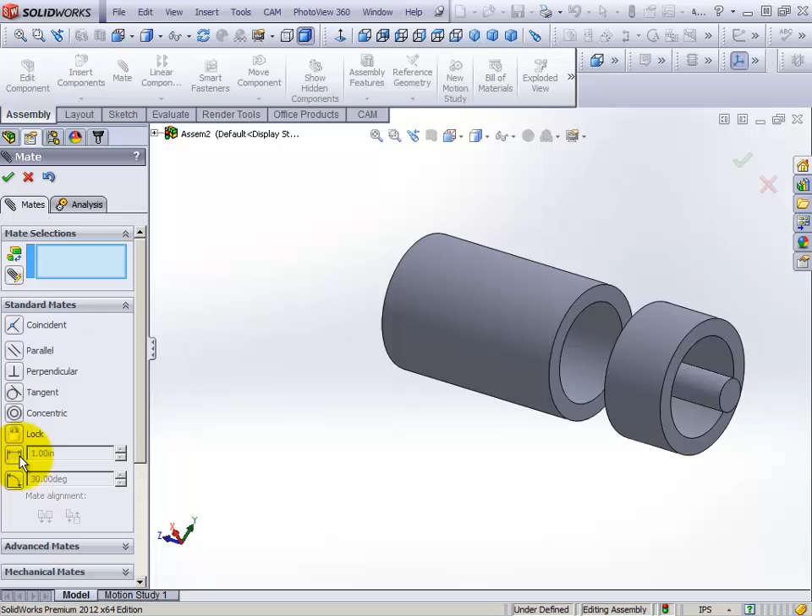Now obviously you can't build parts that are held out in space like that, so there would have to be some real constraints on that - real components to fill in that gap. But these are called concentric mates. Between coincident and concentric, you're going to use those the most. There's a couple more over here called parallel mates, perpendicular mates, and tangent mates. But with all three of these plus the distance, you can put any type of machine together you want, any type of structure. You can build a skyscraper, you can build a dam, you can build a car. That's all it takes, these right here.

Okay, we're going to end there. This is about - we're coming up on 25 minutes worth of video here. Hopefully this will allow you now to make your own assemblies. I'm sure you'll have a couple questions, but I think this will get you pretty well going on that. Okay, thanks.